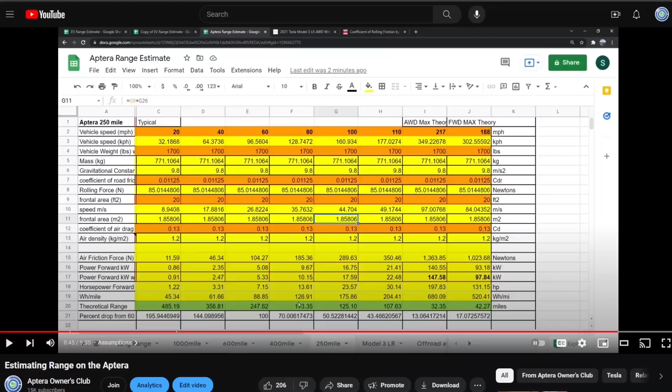About 2 years ago, I made this video called Estimating Range on the Aptera, and I think it's time that we need to visit this again for a couple of reasons.

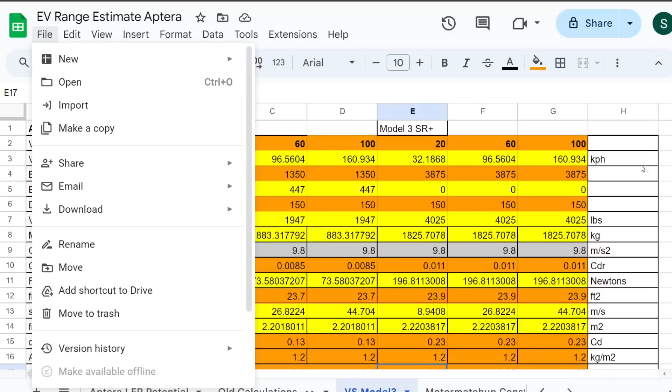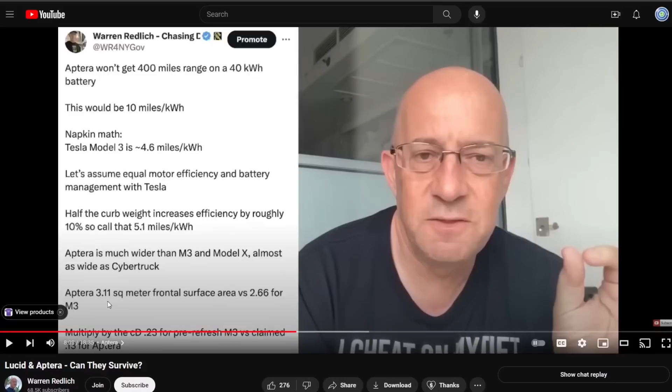The reason I want to revisit this is some people who don't really have a strong grasp of physics were doubting the engineering and the physics of actual engineers. Warren Redlich had this video on January 13th about can Aptera survive, and he's quoting his Twitter or X post where he has some pretty inaccurate assumptions. So here we go.

He's basically saying that the efficiency numbers Aptera is putting out are completely bogus, can't be true. Drew, a couple days ago, did a video about whether Aptera efficiencies are too good to be true, and he did a great job. You should watch his video, he explains it very well.

In this video, I want to get more into the nuts and bolts of it and get into the physics. So how is efficiency determined? There's basically three things that determine the efficiency of a vehicle. There's two forces that the vehicle needs to counteract in order to move forward.

One is air resistance, and air resistance is the largest component. So the formula for air resistance, let's blow it up here: force of air resistance is 1/2 the density of the air, times the drag coefficient, times the frontal area, then multiplied by the velocity squared. That is the formula for air resistance.

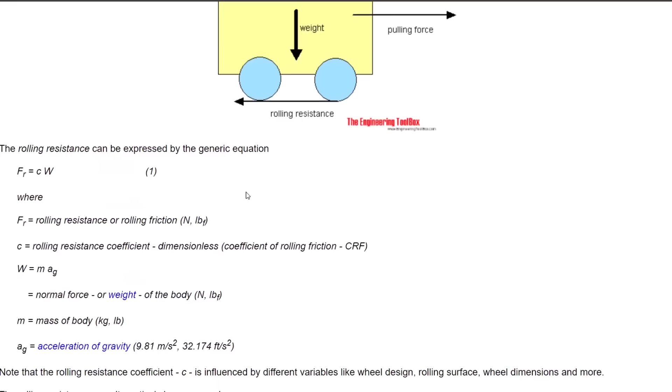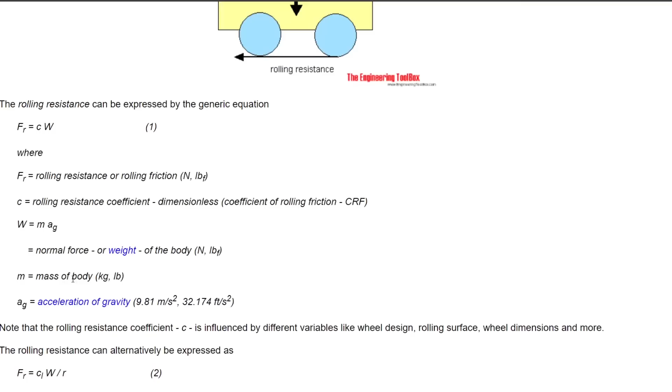The other thing the vehicle needs to overcome is rolling resistance. The formula is: force of rolling resistance equals the coefficient of rolling resistance times the mass times the acceleration of gravity. The acceleration of gravity is constant for everyone on Earth, it's 9.81 meters per second squared. Then the mass in kilograms, multiplied by the coefficient of resistance.

What determines that coefficient? It's very, very complicated. There's lots of things that go into it, but basically it's how much the tire deforms on the surface, how rough the surface is, how sticky the tire is, and how big the contact patch is.

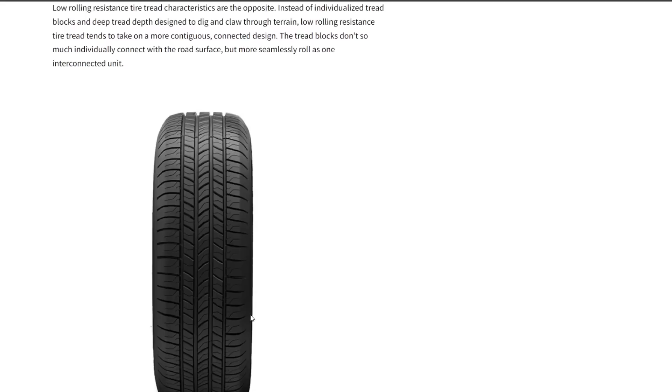There's a pretty good article from Tire Buyer talking about low rolling resistance and what affects it. Tread design: obviously if you have big knobby tires like off-roading truck tires, they're going to have more rolling resistance, which is why road tires have a smoother tread. If any of you are cyclists, you've noticed road bikes have very smooth tread and mountain bikes have rough tread because it gives them more grip on rough terrain, but you sacrifice rolling resistance. It's much harder to push that tire on a smooth road.

Tire tread compound: how sticky is the compound? So what has the least coefficient of rolling resistance? It's railroad steel wheels on steel rails, because the wheel isn't going to deform at all since it's steel, and the track is very smooth. So you have a rolling resistance coefficient of like 0.001, that's 10 times less than an automobile tire, which is usually about 0.01. But what do you sacrifice? You'll have basically no grip.

And if you had a car that has steel wheels, you'd have amazingly good rolling resistance, but you couldn't turn or stop very well, or accelerate very well. So that would be bad.

But tire compound, they're stickier tires. So those of you who race cars know there's track tires that are really sticky, but they burn through really fast, and you won't get as good efficiency with those.

The rolling resistance is pretty high on those. Stiff sidewall - the more the tire squishes and deforms, that's energy being used to deform the wheel and bring it back. So stiffer wheels give you better rolling resistance. That's why if you air up your tires and give them a lot of tire pressure, that makes the tires stiffer, so they deform less.

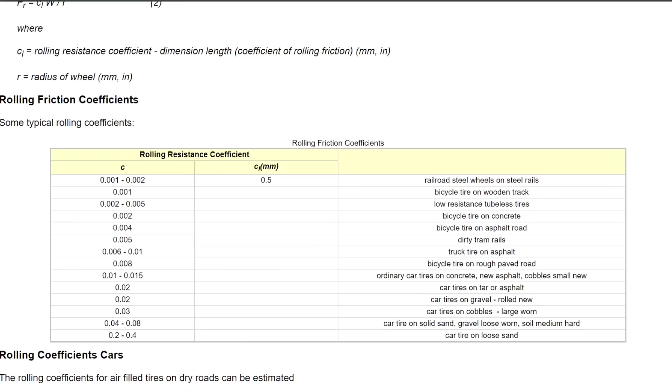And then weight reduction - weight reduction obviously is one of the factors in the formula for calculating this. So those are the 2 major things the vehicle has to fight against.

And then the last thing is the efficiency of the drivetrain - how efficient is the drivetrain at turning electrical energy into actual physical kinetic energy, physical propulsion, and how much drain is there from the other subsystems on the car. Basically you have to use some energy to do the climate control, battery management, thermal management, and to run the computers and stuff.

So there's going to be some small amount of energy for that stuff. But the biggest things are air resistance number 1, rolling resistance number 2, drivetrain efficiency and other loads on the car number 3.

Okay, so Curtis has put together this spreadsheet that takes into account all these things. So you look at weight. Here it is - remember for the air resistance you need to know velocity, so here's velocity. You need to know the weight of the vehicle, so here's the base weight, battery weight, driver weight.

And you can change when you make a copy - just change all these numbers however you like. So this is the estimated weight of the Aptera, about 2,000 pounds, and that's the best information we know. We don't know the exact weight yet, but we've been told it's roughly this, about 1,800 pounds without a driver. We know the weight of the Model 3 standard range, and that's pretty good - it's about double the weight, okay?

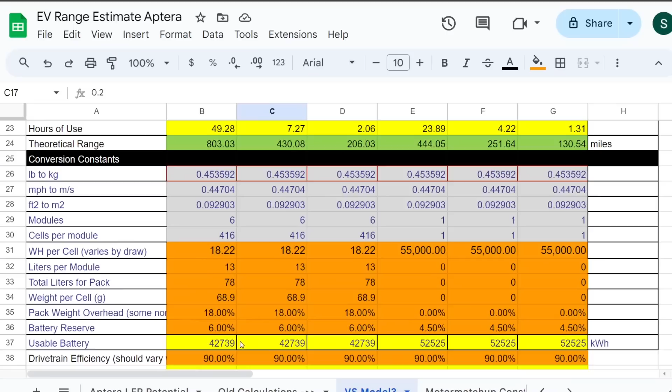And then we know how much usable battery we expect them to have, because we know it's a 42 kilowatt hour battery. At these different vehicle speeds - 20 miles per hour, 60, 100 miles per hour - you can expect ranges of 800, 430, 206 miles. That's the range. And on the standard range Tesla, 400, 250, 130 miles at these different speeds. So you see how speed makes a huge difference on that.

So let's go look at this and look at some of these assumptions being made. Half the curb weight, let's assume equal motor efficiency and battery management with Tesla - reasonable assumption. I think electric motors, we know pretty much how accurate they are. There's not huge differences. All electric motors are upwards of 95% efficient, so that's not going to change much.

The curb weight increases efficiency by roughly 10%. I don't even know where people are getting these numbers from. I think they're just pulling them out of the air.

Let's look at what happens - let's look at the Model 3. Let's see what happens, so the range is 250 currently at its current weight. Now let's decrease the weight by half, so we'll decrease it by 2,000, so it's 1875. It decreases by 2,000, and look at that - it goes from 250 to 330. That is not 10%.

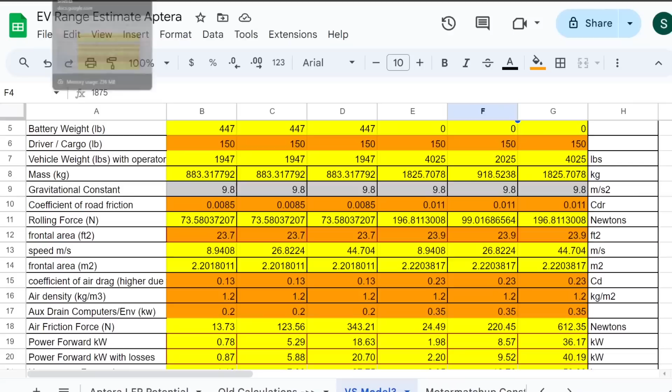Let's see if I can remember what frontal area he calculated. Okay, so he goes up... let's see here, okay so he calculates a frontal area of 21.12, so 21 square feet. That's actually a little less than what we noticed - we know pretty well what the frontal area is.

If you calculate a frontal area of 20 - so he calculated 21 - let's put it in here. So he calculated like 21.6, that would make a frontal area of 2 meters squared. The actual number is 23.7, it's actually 2.2 meters squared, which is obviously way different than 3.1. It's like 1/3 the frontal area that this back-of-the-napkin math is calculating.

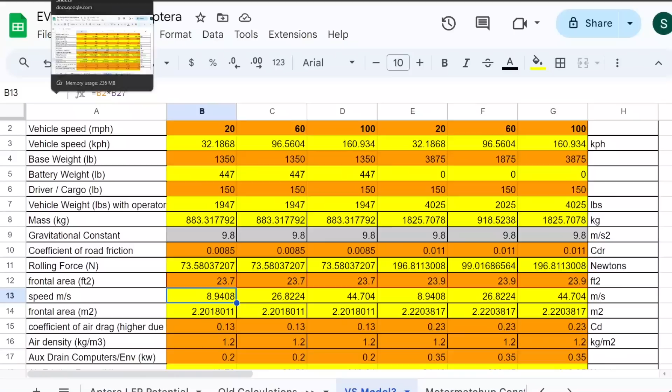How do we know what the frontal area is? Well, Aptera released its actual 1/48 scale official model on Thingiverse, so you can download this STL file, scale it up 48 times, and then you know exactly what the frontal area is. There's this program called Perea which will calculate the frontal area - most lift and drag actions require the use of frontal and projected area.

This is a software package - you feed it STL files and it'll tell you what the frontal area is. Bennett in our Discord channel, he used Perea. Here's the STL file - he used Perea, had it calculate the frontal area, and it calculated the frontal area as 959. Then you multiply it by 48 twice because it's a square and it's 1/48 scale, and divide it by 1,000 twice to get meters squared.

So then you get 2.209 meters squared. That is the actual best information we have—it's Aptera's official file. That's very close to what Drew got. Drew got 21.7, the actual is 23.7.

So in terms of frontal area, it's almost exactly the same as a Model 3. Model 3 is 23.9, frontal area of the Aptera is 23.7, because it is wider, but it doesn't use as much frontal area because of those wheel pants that are out there.

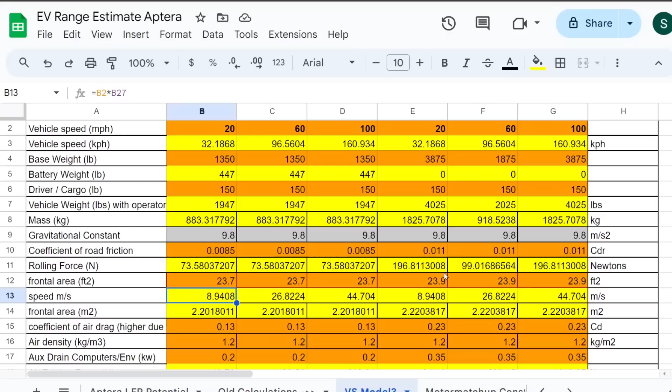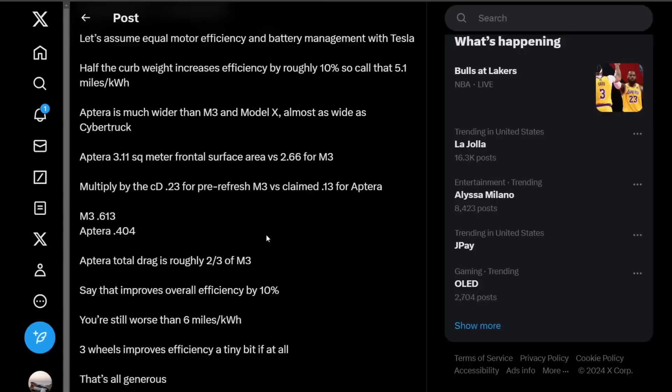All right, so this is just so wrong. It's so off. He says that the total drag is 2/3 of a Model 3, and that improves overall efficiency by 10%. No, wrong again.

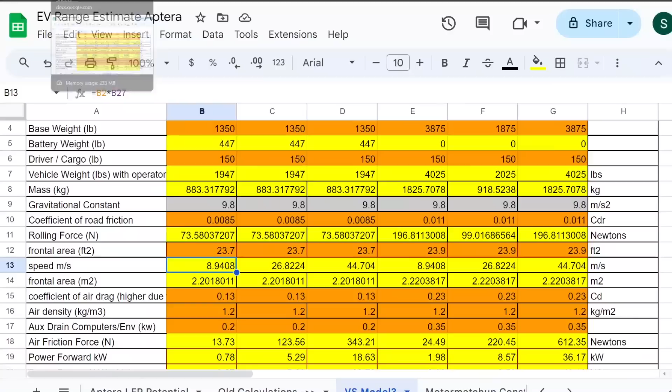You can see what doing that will do, like what will happen if you decrease air resistance. The air resistance force is obviously way better than his calculation because he calculated it based on a frontal area that is much larger than reality. But even if you were right about that, if the total drag is 2/3, it does not improve efficiency by 10%. Okay, we will see.

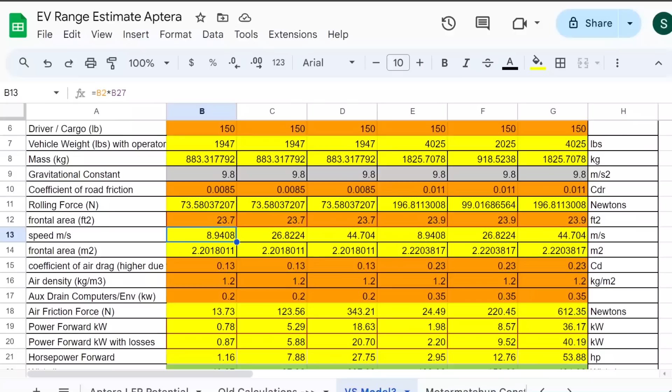Let's go back to the Model 3 again. Let's say this frontal area—the easy way to make it 2/3 is to just decrease this to 2/3, times 2 divided by 3. Okay, so this is 15... 16, all right. So let's see what happens when we change this from 23.9 to 16.

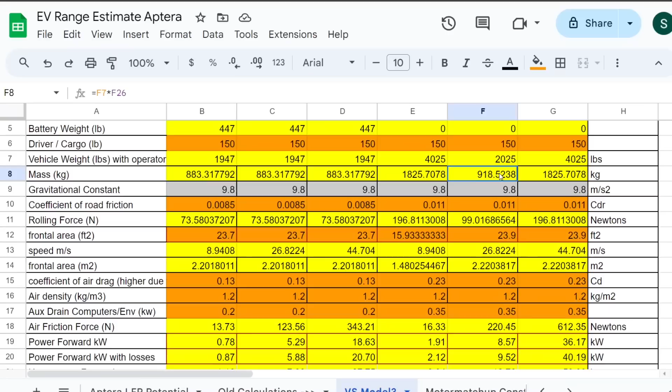So range currently is 327. Okay wait a sec, I need to change the rolling resistance back. Let's change this weight back to what it was—3875. Okay, so we're back to normal.

So 251, and then we're going to change this to 16. That gave 251—so that changed it by 20%, not 10%, 20%. Now, what we do know is that the frontal area is completely off.

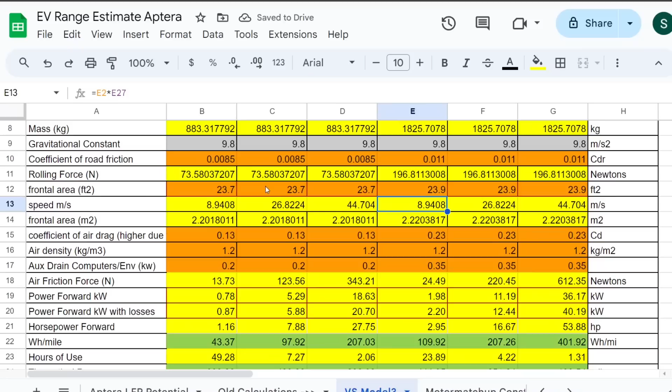23.9. And so you see how when you take into account the rolling resistance and the actual correct frontal area, you can see that the prediction is very close to correct.

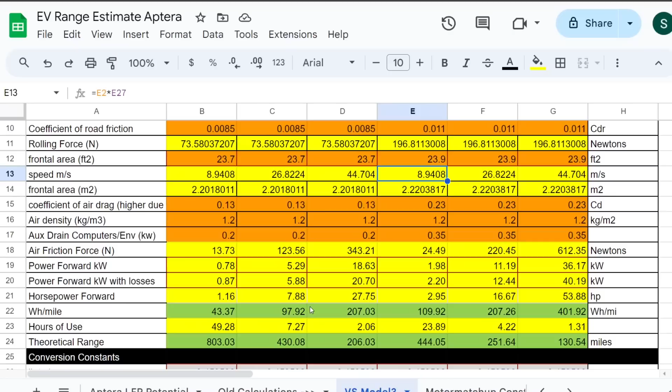You see that the watt hours per mile is twice as good as the Model 3. This is 207 watt hours per mile, and Aptera is 97 watt hours per mile. Remember, Aptera has always been saying about 100 watt hours per mile, and that's what we get. That's with these assumptions, which are as accurate as we can get it.

Now, there is another website called—let's see, here we go—it's called Motor Matchup. This is a pretty fun website. You can do drag racing and range estimations of all kinds of things.

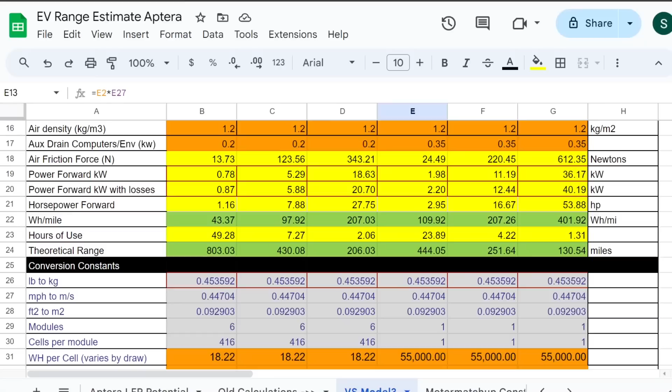So he's using this as the driving weight, 1924, which is very close to the weight that we're saying, 1947. Very close. And then he's using a coefficient of drag of 0.13, which is what's always been said. And he's using a frontal area of 2.3, which is a little higher, but that's a very good estimate too. Remember, the actual frontal area is 2.2.

And then he's using a coefficient of rolling resistance of 0.0075, which is very close to the estimate that we're using, which is 0.0085. And so if you do that, you can look at what the efficiency is at these various speeds. So he's calculating 105, we calculated 97, he's calculating 105.

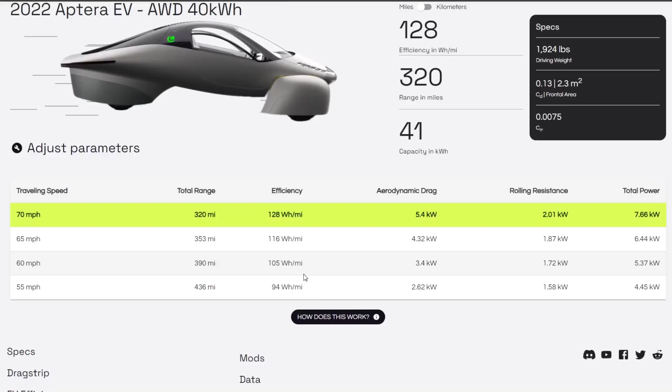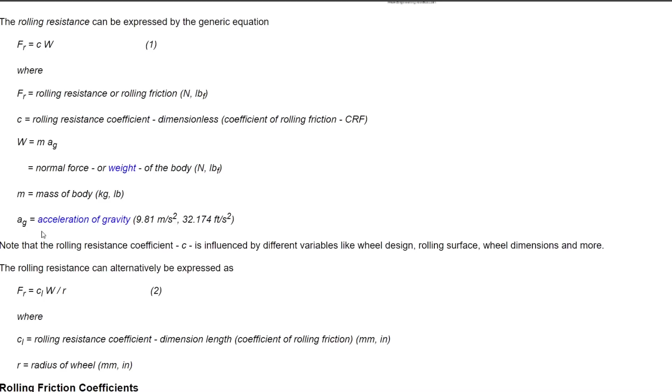And if you look at Tesla Model 3—okay sure, we'll go 2024 long range—go. And so you see here, he uses this, giving them the same rolling resistance, but you can still see that Aptera doubles the watt hours per mile, or halves it—it's more efficient. It's twice as efficient because it uses about 100.

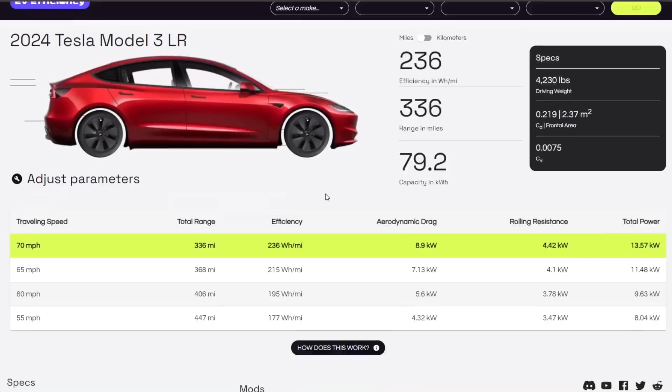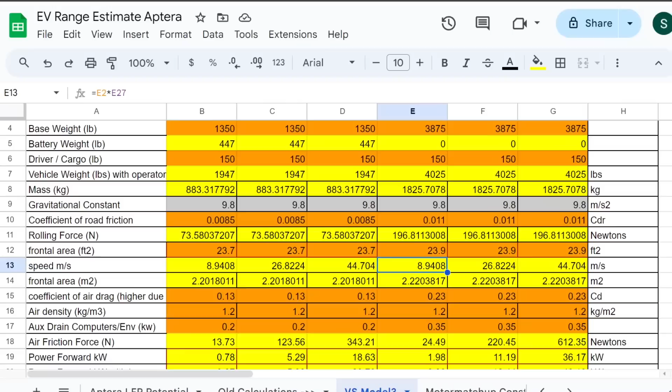Okay, so basically, I know that was a little mathy, and if you like an explanation with less math and just better presented, go to Drew's video. This is a little more mathy.